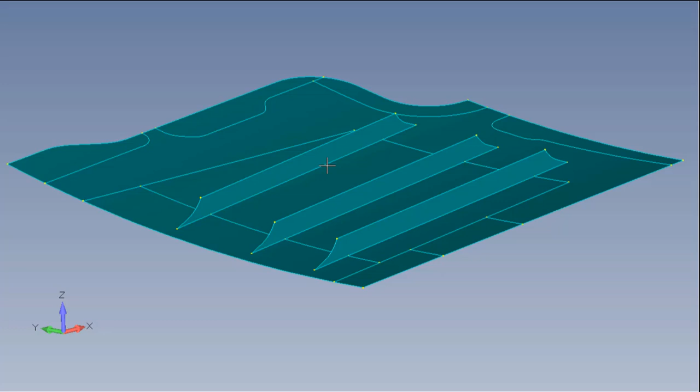So let's go into tet meshing if you want to get a solid mesh, but obviously that gives a lot of nodes and elements. What a lot of our customers would rather do is get this down to a nice shell mesh.

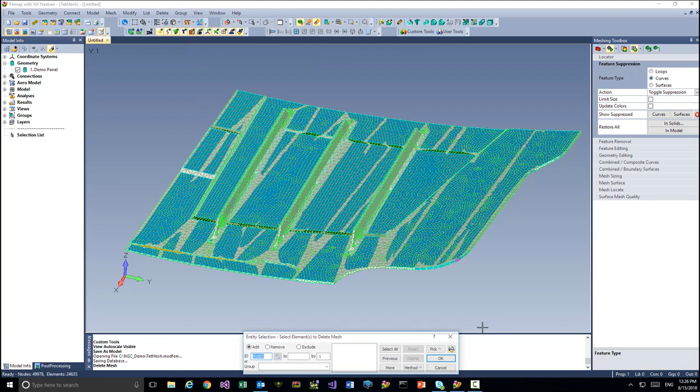So let's just delete that tetra mesh. We'll keep the materials and stuff around. Now if we're going to mid-surface this, that's kind of the next activity here.

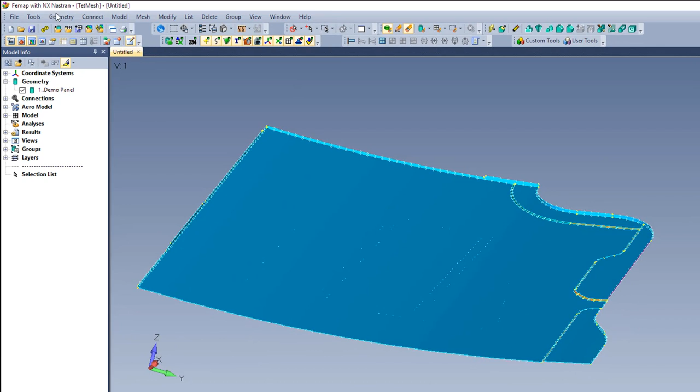There's basically one main plate mesh we're going to get in this direction on the part. So let's get that surface - there's a big one on the back here. We'll start our base surface with an offset. I'm going to change my pick mode to front.

Femap calculates a guess at the thickness and creates an offset surface. So now we've got our original part and then this offset.

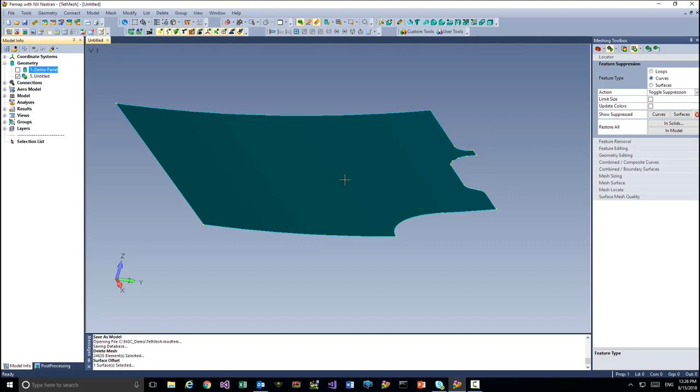But it doesn't go far enough, so we want to get this all the way out here. Let's just remove some curves - we just want to do a basic removal. We'll remove that little section, do the same thing here, and there's three.

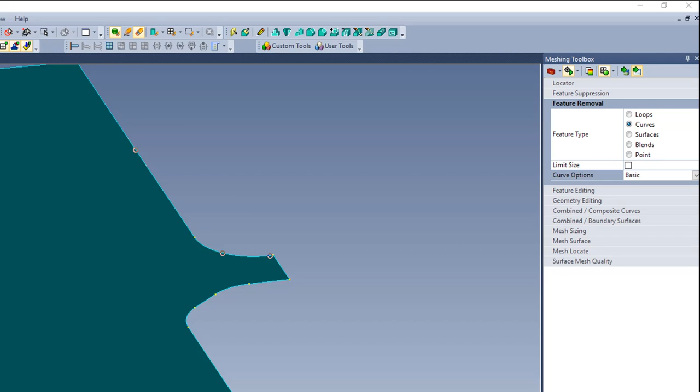We'll get here, and then get rid of this stuff here. When there's a lot of curves, I'll use pick tangent - this is new in version 12, so it's pretty handy, you pick one curve and it adds in the rest of the tangent ones.

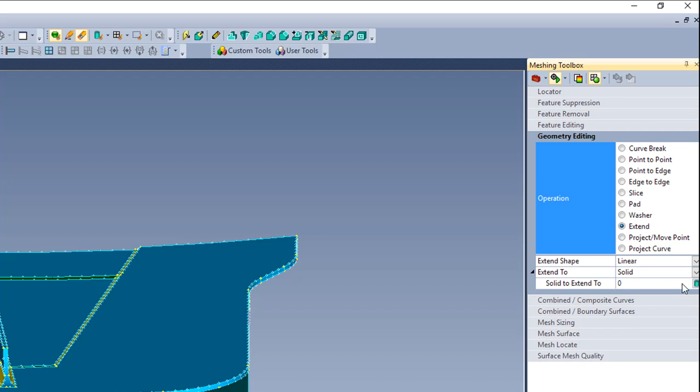Now what I'm going to do is some imprinting. I'm going to imprint curves off of this original solid onto this base mid-surface so that I can capture all these pockets and such.

The first thing we want to do is get rid of this end. So we have this project curve, and there's an imprint, extend, and clean option. This will basically make sure it gets to the ends.

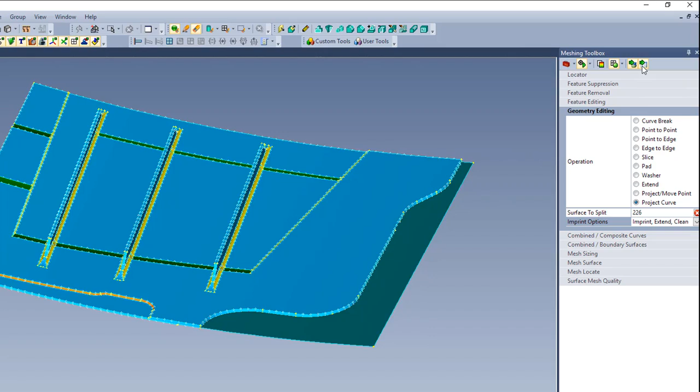So we want to split that surface, and I just want to pick one of these curves, say add tangent, and then shoot that on there. Now you'll see we've got a separate piece I could delete.

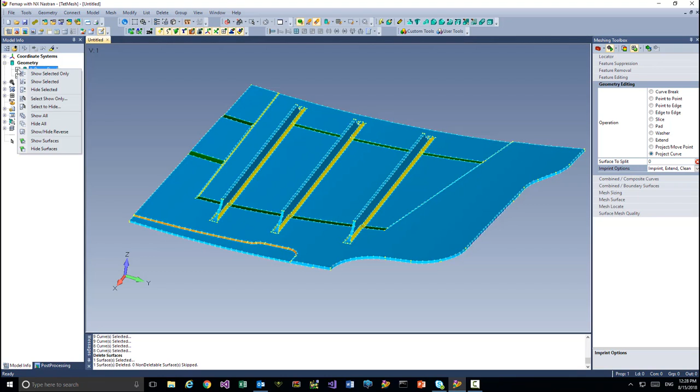So now I've got a really good, nice baseline here to start working out the rest of these pockets. First thing I'm going to do is a neat trick on the visibility checkbox on the main solid - I'll say hide his surfaces. Now I can see his curves, but not see or pick the surfaces.

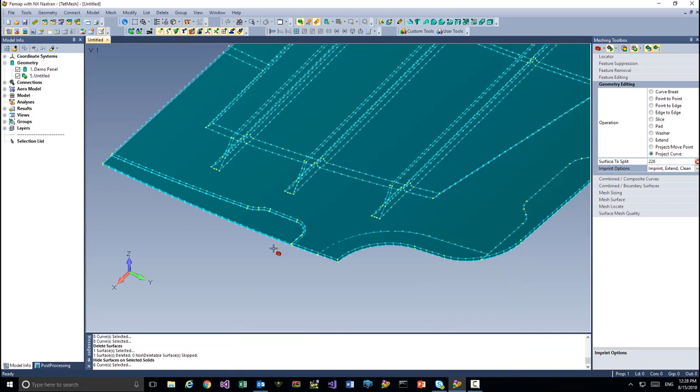So now we can burn these pockets in. We'll do the same project, then multi-pick and add tangent. Now we've put that pocket in. We'll do the same thing over here.

We'll get these two at one time. I want to make sure I'm getting the bigger part of the pocket. You know what, let's flip to the other side here - I want to get the thicker area.

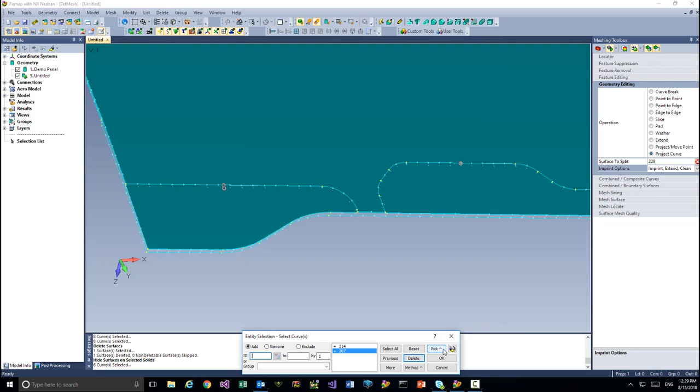So we'll pick one curve there, add all the tangent connected ones, and burn that in one shot. Looks like we've still got this little area here, so same thing - multi-pick, pick one of the curves, add the tangent, say okay.

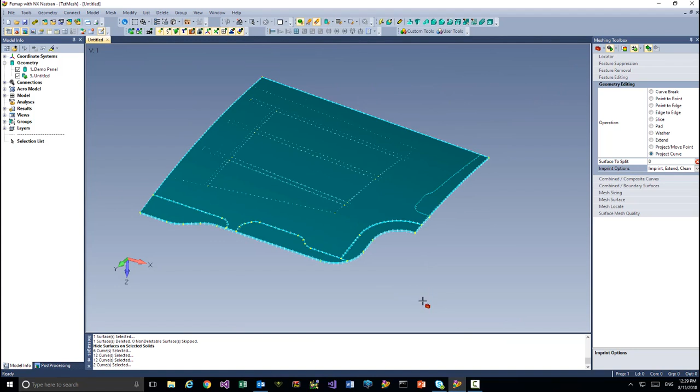So now let me turn off here, let's see, make sure we got all our pieces. I think we got most everything. Now we've got to get these middle pockets in.

Let's do that - again I'll right click and say hide the surfaces. Oh, looks like I missed one. Let's do a project again, so we're going to single pick that surface.

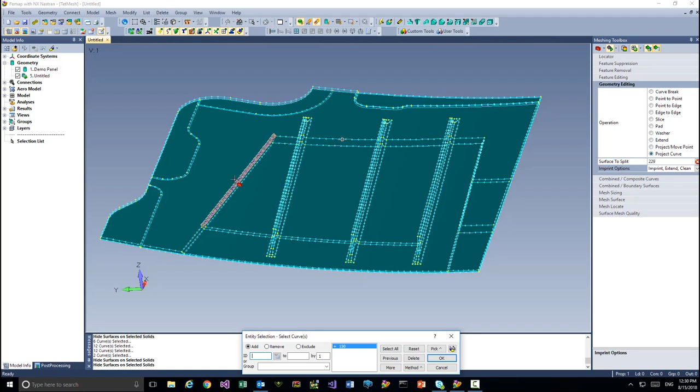Now I'm going to pick just one of these curves on each side, and since that extend is on, it'll automatically extend them and create that whole region in one shot. Same thing - now I pick that region and just pick one curve, and it'll go all the way through.

And then here, let's get the thickened area in. At this point, I've got my main layout here for my shell meshing.

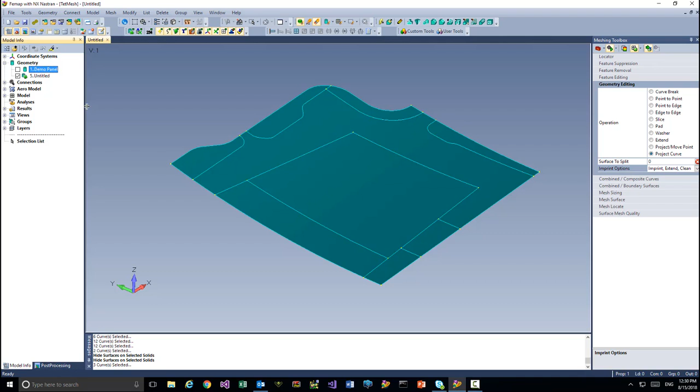Now let's add the stiffeners. We'll turn the original solid back on and get these stiffeners in. Let's do a geometry surface offset.

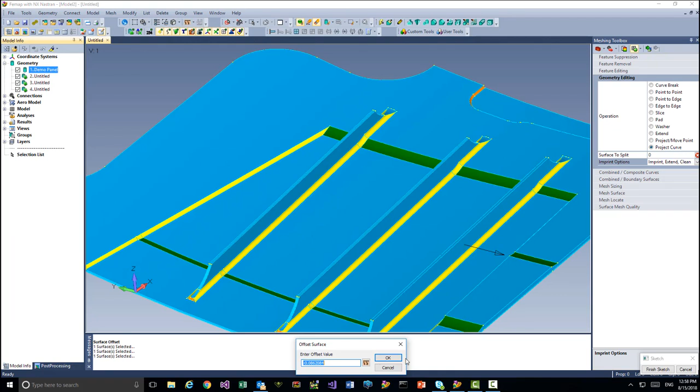And again, make sure we're in front mode here, and just pick that surface. Again Femap calculates the half thickness. Let's put the three of them in, say OK, and turn off our original.

We'll see we've got these pieces - we're looking pretty good here. Now I've found it's easier to just extend these through, connect them, and then delete anything hanging off the end, instead of trying to get it to go exactly to those faces.

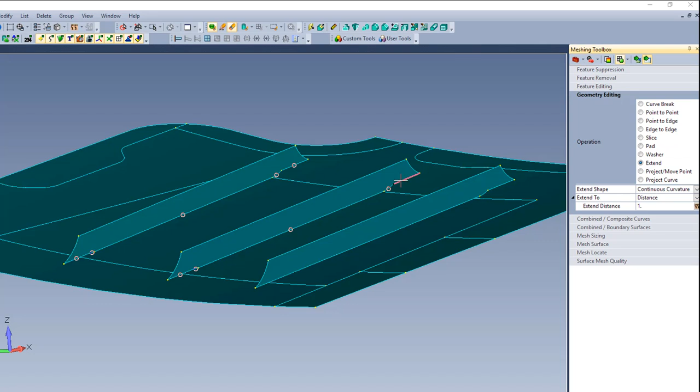So let's go back into our extend and we'll just pick the end curves of these couple surfaces here. There we go, just let it extend, and now they go all the way through. We'll add these together.

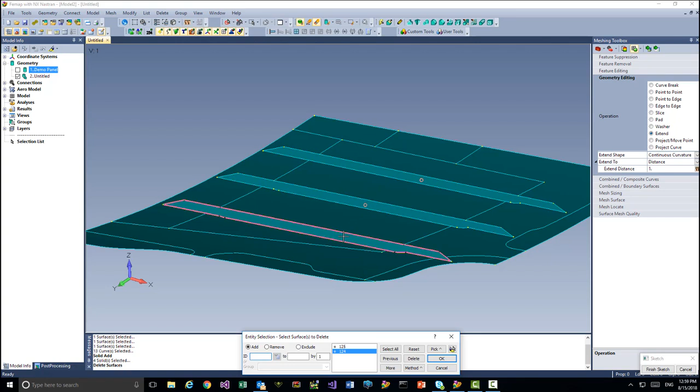And I'm going to create a T-junction non-manifold solid. Now they're connected. Now we can come off on the bottom here and just delete these hangovers. So now we're actually looking pretty good here.

Now we've got all our pockets in. Let's just take a quick look - this should be fairly representative of our part.